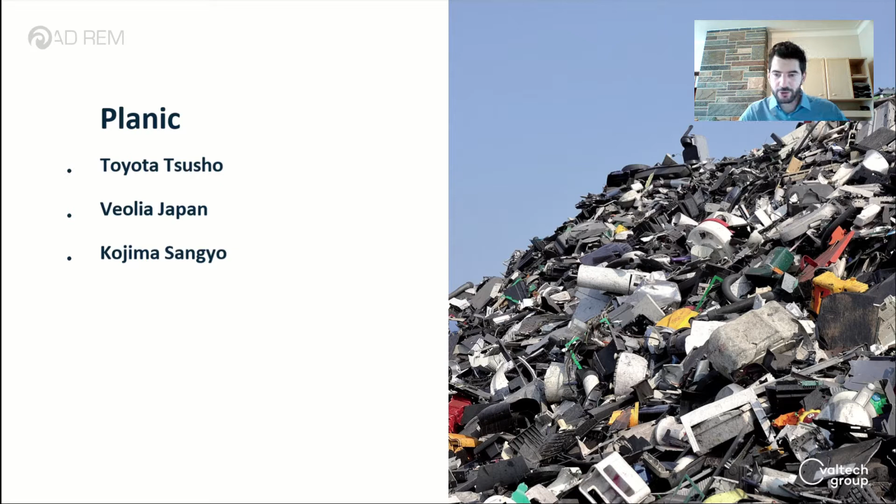That's how Planic got created. Planic is a joint venture company owned by Toyota Tsusho, Veolia Japan, and Kojima Sangyo, which is a producer of parts for the automobile industry. I'm sure the other two companies are well known. They all teamed up, visited Galloo in Belgium, perhaps listened to some of my previous presentations on plastics recycling, and then decided to buy an Ad Rem plant. For those of you who don't know who Ad Rem or Galloo is, let me clear that up first.

Ad Rem, which is short for Advanced Design of Recycling Machines, is the company I work for and was created as a joint venture between the Galloo Group and Valtech Group. Both of these groups are based in Belgium and are family owned, and in fact the owners of Valtech are the cousins of the owners of Galloo.

However, their business is not the same. The Galloo Group is involved with the recycling of metals and plastics from shredder residues. They are one of the largest in Europe. And the Valtech Group is a group of no less than 13 engineering companies, all active in machine building for the environmental and textile industries.

Ad Rem fits right in between. We are first and foremost an equipment manufacturer, but in doing so we can rely on the decades of experience from Galloo. Long story short, Ad Rem develops and commercializes the machinery used at Galloo and sells it to other recycling companies worldwide. Here's a short company video that we included in this presentation, just to get you a little bit more familiar.

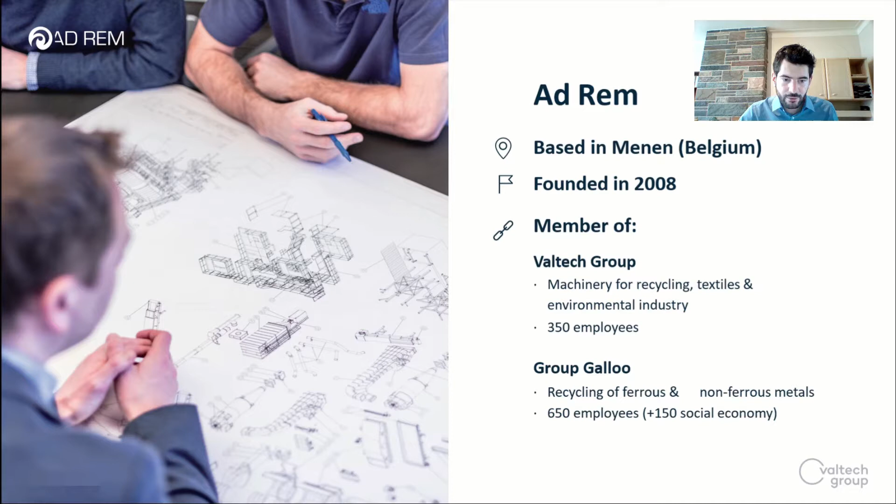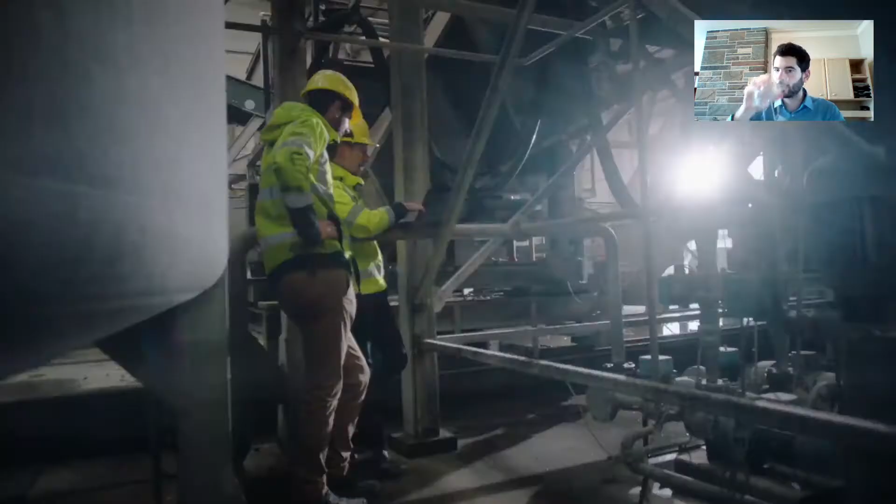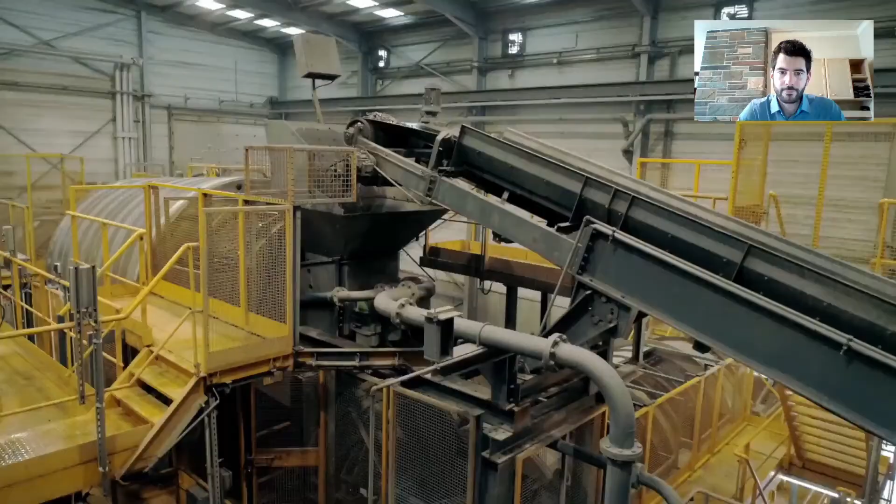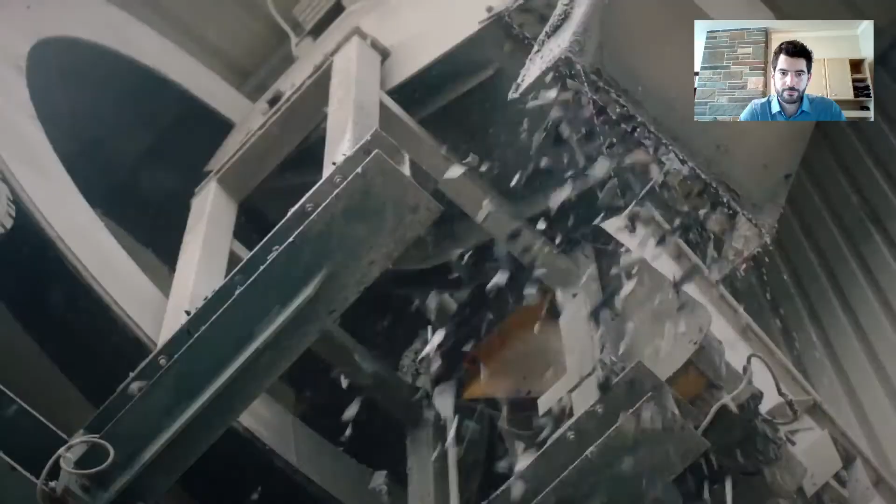Our world is a beautiful place. It's where we work, where we play, where we dream. But what about our children? Every year, millions of tons of waste ends up in landfill. It damages the environment. Ad Rem changes that. We are leading the way in ensuring we leave a legacy for future generations. We specialize in the research, design, engineering, and construction of equipment for the recycling, mineral, and food processing industries. By making it possible to separate and recycle waste from cars, electronics, and household appliances, our technological innovation helps the world to recover more resources. Since 2008, Ad Rem has developed and optimized new ways of separating diverse waste streams and materials. As a joint venture, we are the result of a meeting of minds. The expertise of Galloo, Belgium's largest recycler, and the know-how of Valtech, an engineering and construction specialist closely connected to the recycling industry. Together, we have engineered a range of patented separation processes around one single goal: maximum waste recovery. Ad Rem machines prevent millions of tons of CO2 from entering the Earth's atmosphere every year. We are working to safeguard the future. Ad Rem.

All right, you may or may not have recognized someone in that video. Anyway, back to the interesting part.

So Japan used to mainly incinerate or landfill their plastics or send them overseas. As a result, there is actually today little or no plastic recycling infrastructure installed in the country. Therefore, it quickly became apparent that Planic's plastic recycling program would have to entail the complete plastics recycling process from A to Z. So that's also what happened.

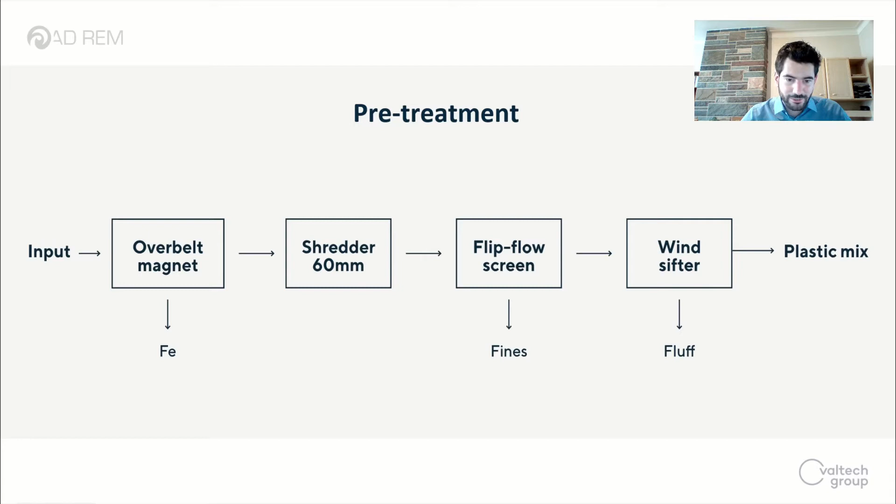Now, to understand our density separation process, we can watch another short video. This is an explainer video that we made a few weeks ago. So this will be the premiere in this webinar. Okay, so this should be it.

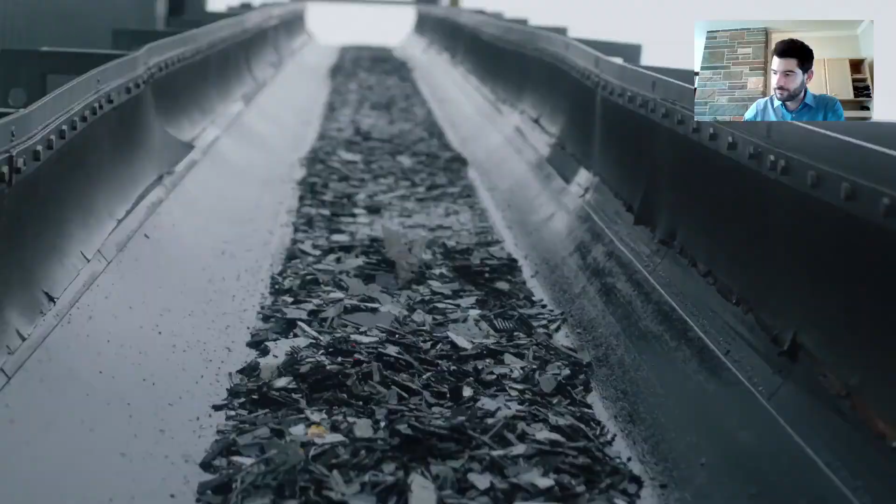Every year, millions of tons of plastics end up in landfills. This not only damages the environment, but also wastes a valuable commodity. Ad Rem are specialists in building the machines that enable separation and recycling from cars, electronics, and household appliances. Our innovative, patented flotation processes are specifically engineered to maximize recovery of plastics from shredder waste. This is how it works. The input to the process can be plastic mix from ASR, WEEE, or other rigid plastics.

The washed material is placed in the plastic flotation tank filled with what we call a medium.

That doesn't mean it can read your mind.

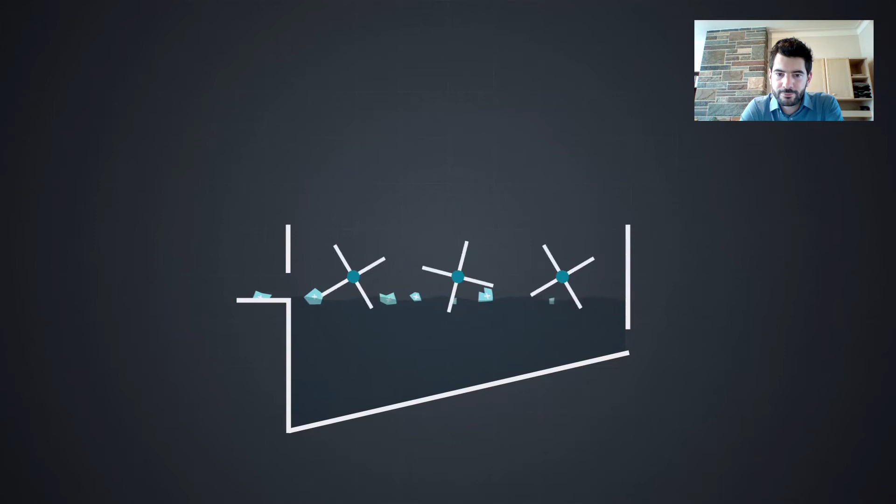Medium is a liquid consisting of water with an added substance to make it heavier. With a density of 1.2 kilograms per liter, 20% heavier than water, the medium ensures good plastics float, while the chlorinated and brominated plastics sink, together with any remaining metal residue. The good plastics float to one side of the tank, with the harmful and currently non-recyclable chlorinated and brominated plastics screwed out at the other side.

As a patented technology, our medium is a suspension and not a solution, which means it can be recovered and reused. pH neutral and harmless for the environment, it is also cost-effective, supporting the profitability of recycling companies worldwide.

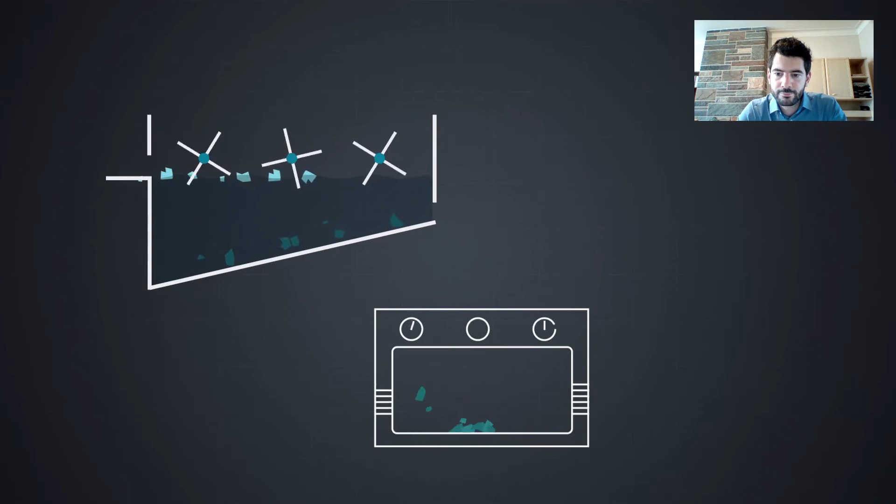In a second separation tank with a water density of precisely 1.09 kilograms per liter, recyclable plastics float while RDF plastics sink. We send the non-recyclable RDF plastics onto a waste-to-energy facility where they are incinerated to recover the thermal value.

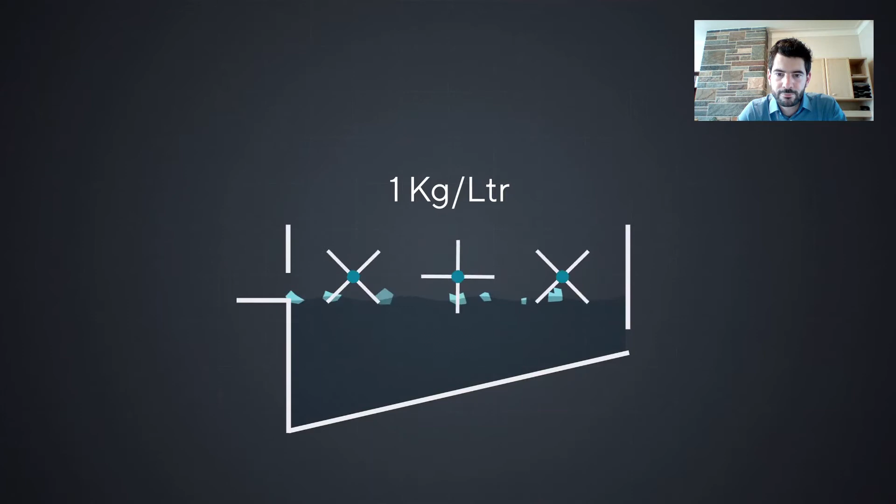In a third separation tank with a water density of 1 kilogram per liter, PE/PP floats and PS, ABS sinks. The end products are then re-extruded and granulated, transforming them into a resource for new products.

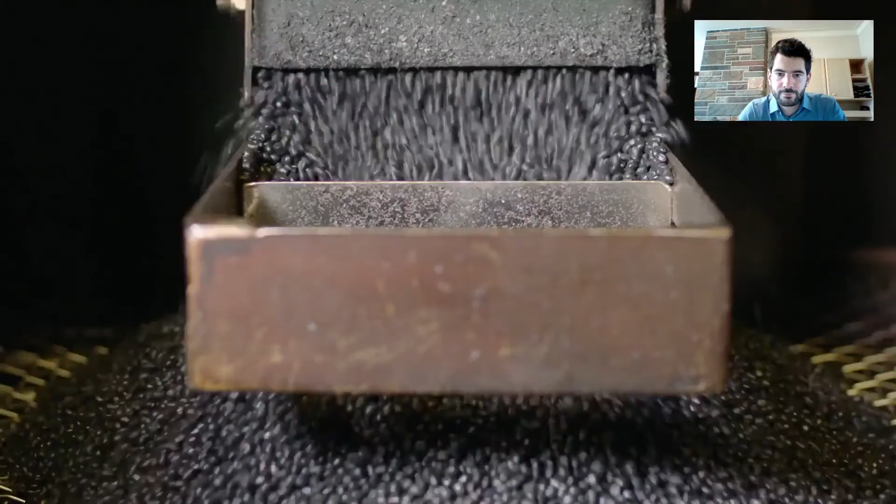At the end of the separation process, we have chlorinated and brominated plastics, waste-to-energy plastics, a mix of PE and PP, and a mix of PS and ABS.

The Ad Rem plastic separation process makes it possible to recover and recycle up to 70% of plastics that previously went to landfill, saving millions of tons of CO2 output while creating significant value for the customer.

Together, we are working towards a sustainable future. Ad Rem.

Right, so let's recap. In the case of Planic in Japan, there is no separation on 1.20 specific gravity. The amount of plastics that could be useful for waste to energy applications is quite low, actually, which has been found this way. So there we skip this step.

So in their density separation process, the plastic mix is first sent through a separator at 1.09 specific gravity. That means 1 liter of medium weighs 1.09 kilograms. At this density, the plastics are separated into two fractions. The recyclable plastics containing the PE, PP, PS and ABS will float, while the non-recyclable plastics containing the chlorinated plastics, the brominated plastics, as well as residual metals and any other non-recyclable plastics will sink. Some of these non-recyclable plastics are, for example, polycarbonates or PMMA.

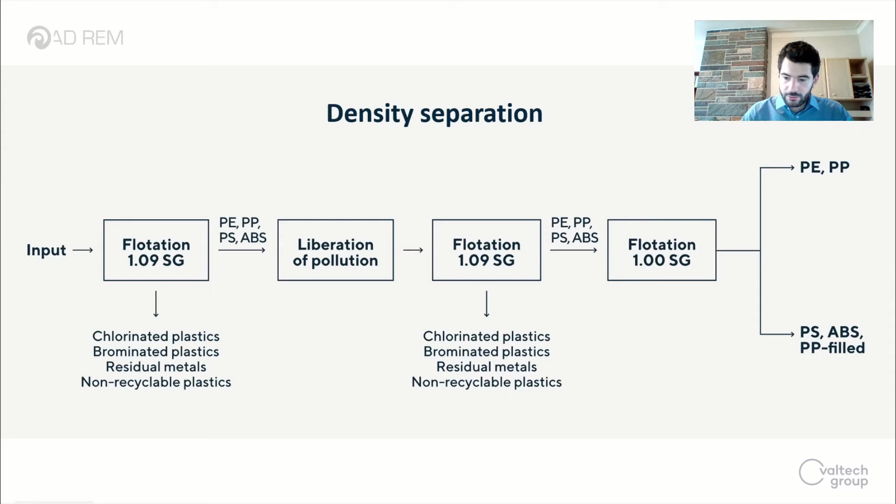Right. The correct density is obtained by adding a pH-neutral agent to water. The use of this agent in the flotation process is actually patented by Galloo Plastics. Of course, we have the license to distribute this technology.

As opposed to the traditional use of salt, this agent does not dissolve in water but remains in suspension, which enables us to recover and reuse it. It is a cheap substance, about €80 per ton, depending on which grade you buy and where you buy it.

And it does not interfere with electrostatic separation further downstream. Other examples of flotation systems that use salt often use salts that cause a disturbance to the charging mechanism of the electrostatic separation. Of course, there are some specific salts you can use to avoid this problem, but then these become very expensive, up to 10 times more expensive than the agent we are using.

In the case of Planic, we actually do 2 separations on 1.09 specific gravity. The bulk of the sinks are captured in the first separation, after which trapped pollution is liberated from the floats and separated off again in a second separation.

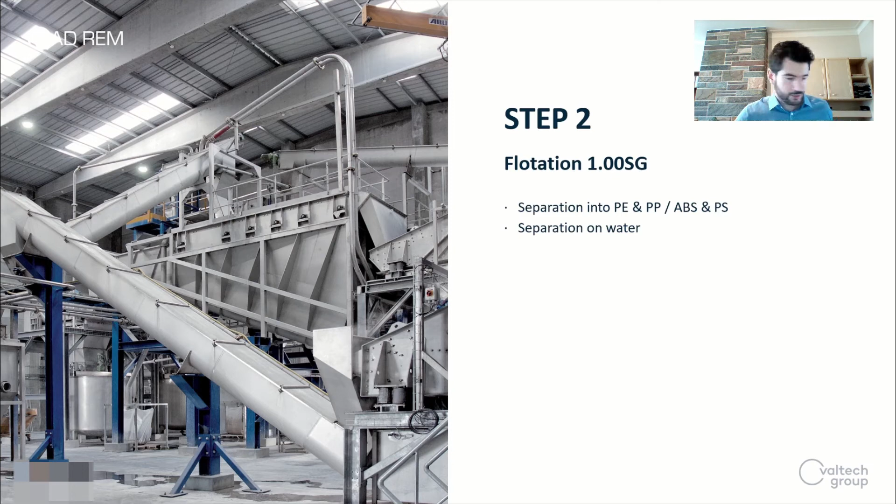The PS-ABS mix continues to an electrostatic separation system in which the materials are selectively charged using a high voltage field of around 35,000 volts. As a result of this charge, the charged particles are susceptible to an electric force applied at the end of a conveyor belt. The charged particles will be attracted towards an electrode with reversed polarity and can be separated from the uncharged particles. By adjusting the splitters, the product purities can be fine-tuned much in the same way as with eddy current systems.

The charging of the particles is critical to the process, which is where the compatibility of different kinds of medium, flotation media, is really important.

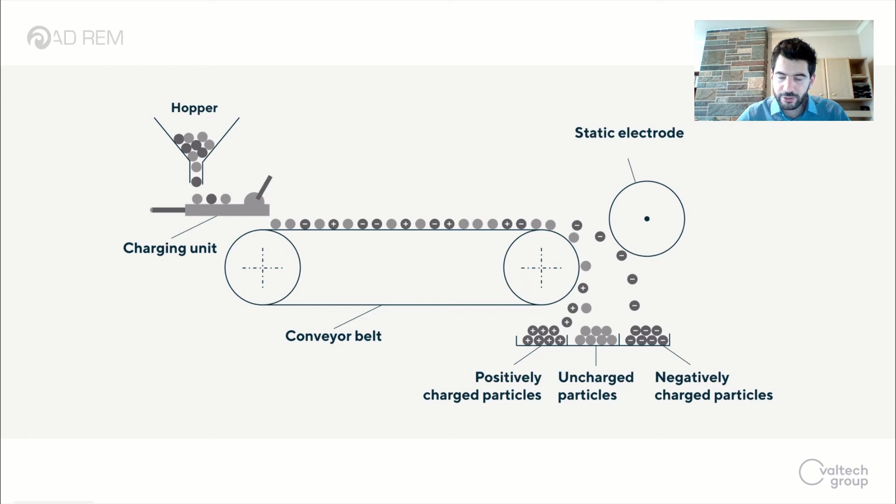The PE-PP mix will be further separated using technology developed in-house by Galloo Plastics. The end result is that two different types of plastics will be ready for compounding, pelletizing and re-extruding, which will be done on site. The PS and ABS can also be turned into new pellets, but in the case of Planic, this will not be done on site.

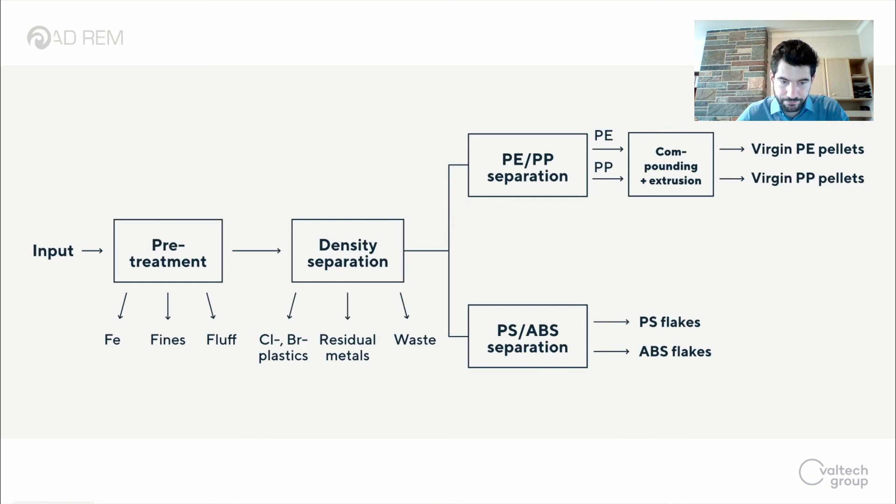Planic's new plant will process around 40,000 tons of plastic material per year. It will be located in Omaezaki City in the Shizuoka Prefecture and is set to be fully operational by 2022.

So next year we are now in the designing phase of the project. Next year we will start with the installation, and at the end of the project the fully operational plant will be ready in 2022. This will be a building, about 120 by 30 meters, I think, that will be filled with this equipment.

After 20 years of in-house plastic recycling at Galloo, and Ad Rem already having built many other plastic processing facilities around Europe - for example at AO Recycling in the UK, we finished the plant last year to process fridges. This was with the same setup: we have the 1.09 and then the 1.0 density steps to separate the different plastic fractions, and then the PS-ABS mix continues to a HAMOS electrostatic separation system. This plant has already been fully operational for almost a year, I think.